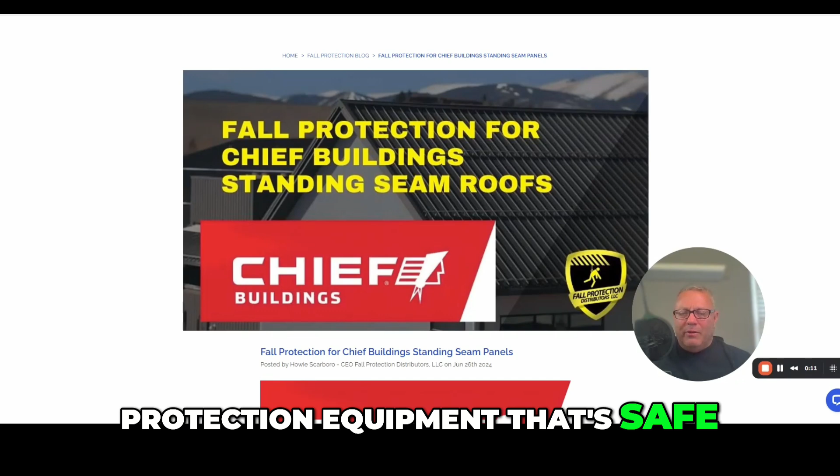I'm Howie Scarboro. I'm the CEO of Fall Protection Distributors, and we've recently released a blog about Chief Buildings standing seam profiles. And what we're talking about is compatible fall protection equipment that's safe to use on their roof systems to protect both the roof metal and the workers.

So if you'll jump into this blog, you'll see we go well into depth into the different products and the different panels. We talk about which gauges you can get them in, the shapes of the seams, and we'll make it very easy to identify which panel you have on the project that you're working on.

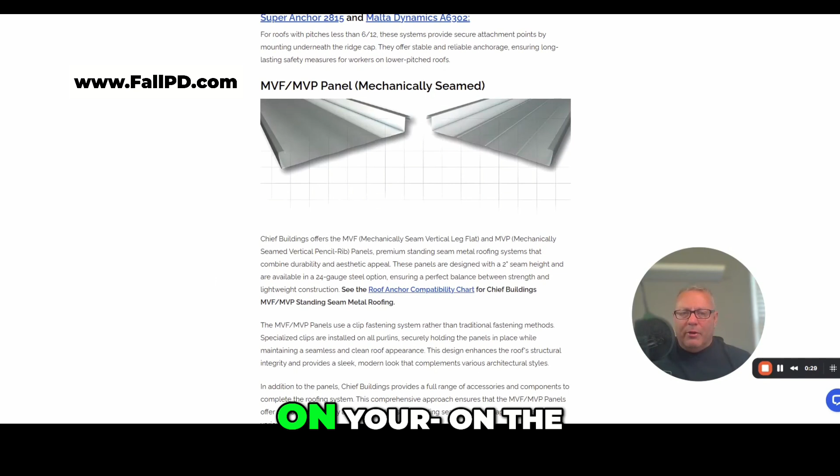So all along this article, there's several links to this roof anchor compatibility chart. That's just going to jump you down to the quick reference chart that's at the bottom of the page. So now that you know which panel you're working on, those are listed across the top. We're very compatible with their series of standing seams. So let's talk about the equipment.

So starting with the seams, the SSRA1, this is available with two different types of set screws. So the standard configuration is an all stainless steel cup tip screw. This is meant for 22 gauge steel. You're going to torque these to 90 inch-pounds. So this is going to give you a single worker tie off. And with the removable D-ring, you can add adapter plates to this. We'll get into those in a minute.

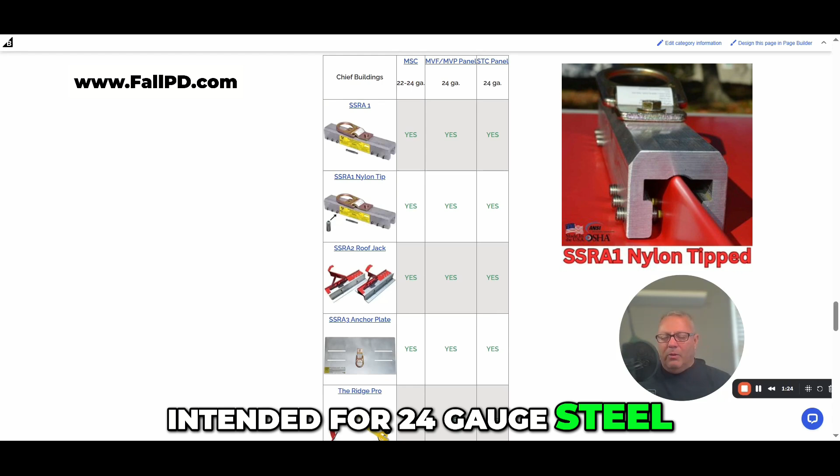The other alternative is an SSRA1 nylon tip. So the nylon tip, it's the same anchor, it's just a different screw. It has the little nylon bushing in the end. And this is intended for 24 gauge steel. So we're going to use a softer bite on the seam, but we're going to use a little more torque. On this one, we're going to go 180 to 200 inch-pounds.

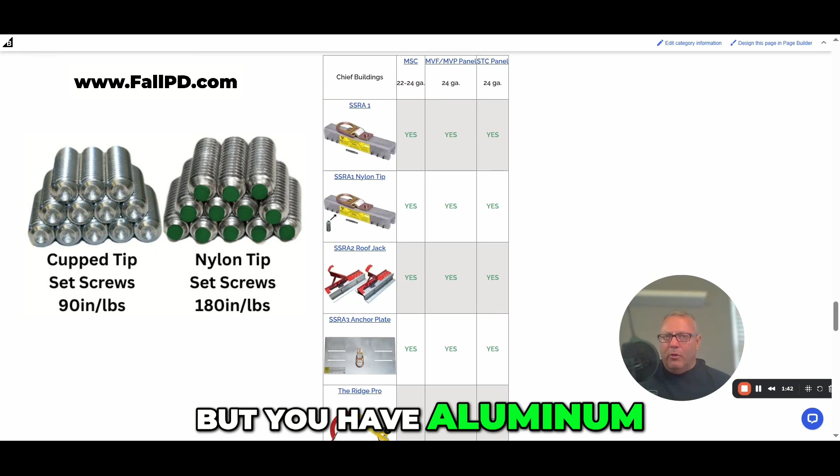So with either of these, we're talking about steel panels only and 22 or 24 gauge, and these are non-curved panels. So if you have a similar panel, but you have aluminum or zinc, 26 gauge steel, 29 gauge steel, or a curved panel, these are not compatible.

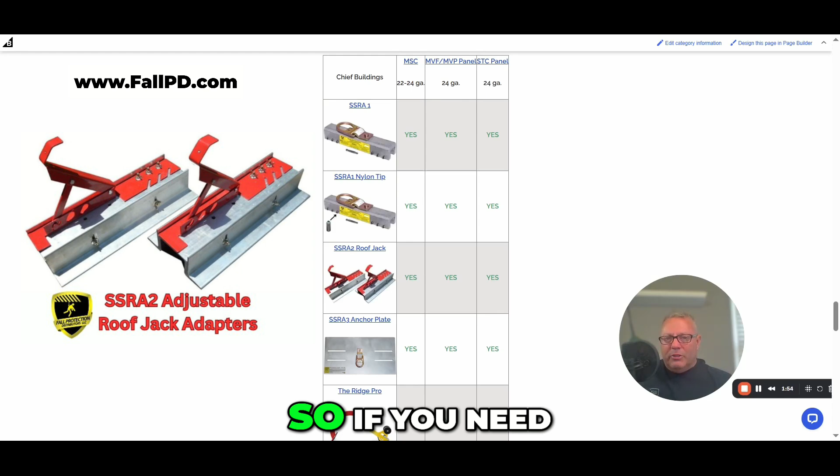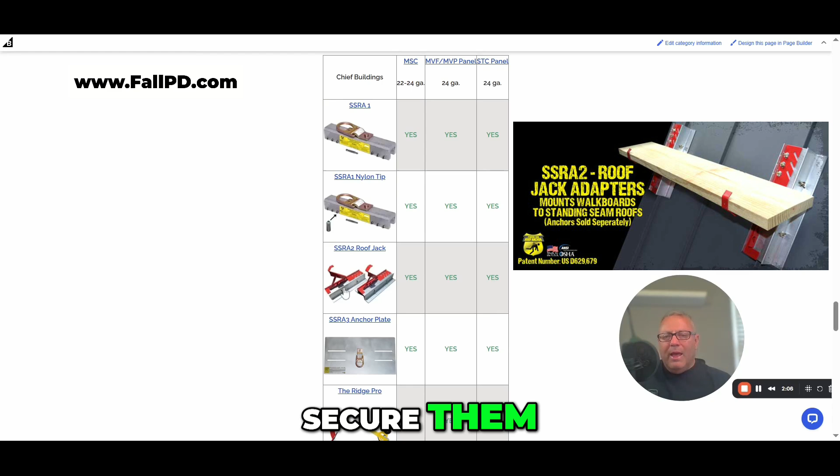So once you have your seam anchors in place, now you can add adapter plates. So if you need to add 10-foot walk boards, you would mount two SSRA1s about 8 feet apart. You would remove the D-rings off the top, and you would drop a pair of SSRA2 roof jacks on top, secure them, and these are adjustable for different height seams as well as different pitch roofs. So that's your 10-foot walk board.

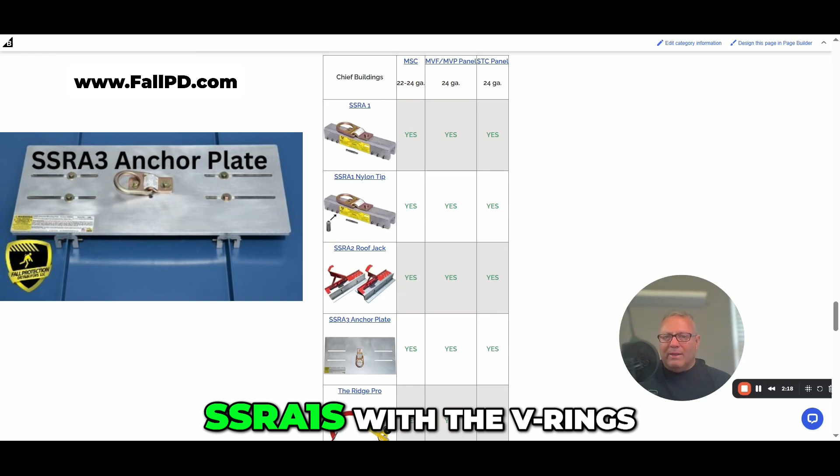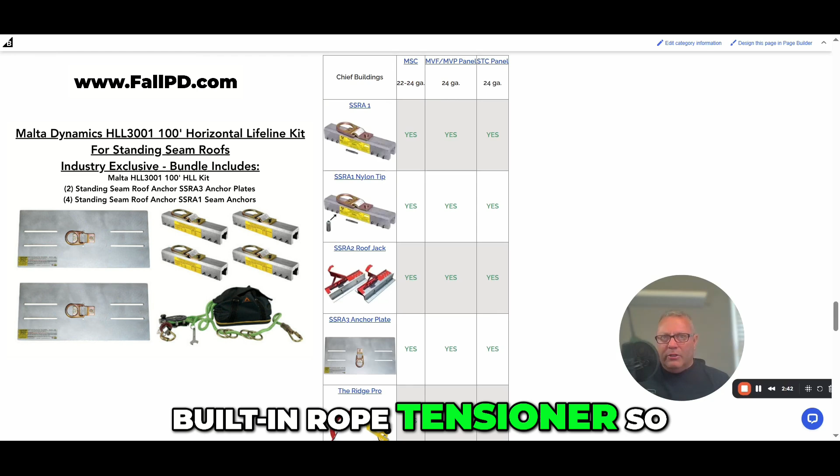If you need 100-foot temporary horizontal lifeline, you can use two SSRA1s with the D-rings removed and mount an SSRA3 anchor plate on top of those, and you would have one of those assemblies at each end of a 100-foot rope. That 100-foot rope, we do offer a kit on our website that has 4 SSRA1s, 2 SSRA3 anchor plates, and a 100-foot temporary horizontal lifeline, and that has a built-in rope tensioner, so you can shorten that rope to any length that you need to get the task done.

Now, it's going to be safe for 2 workers on that horizontal lifeline. If you have more than that on your crew, just add a couple of extra SSRA1 seam anchors. Just mount them on a seam below the rope, sort of near the work area, and once your worker gets to his work area, he can clip off the rope and into a fixed anchor point down on the seam.

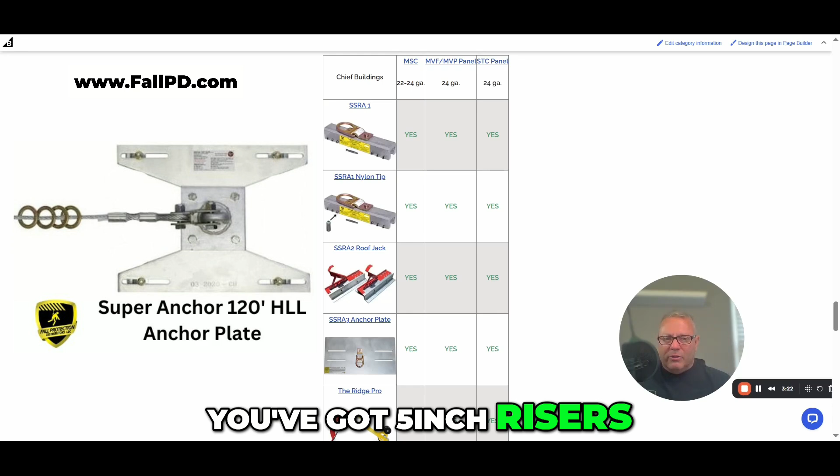So we also have an industry exclusive 120-foot permanent horizontal lifeline. That's a galvanized steel cable. You've got 5-inch risers. It's made exclusively for standing seam roofs. You got seam clamps, base plates, and 5-inch riser posts. So that's another that might work for you if you need a permanent solution with a horizontal lifeline.

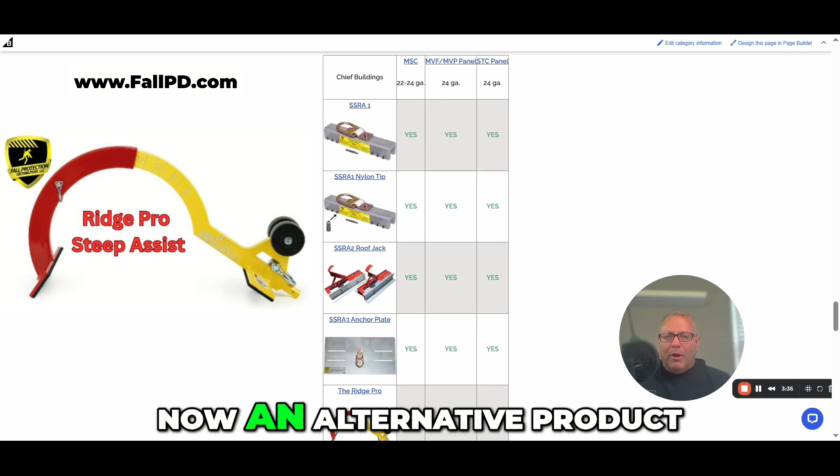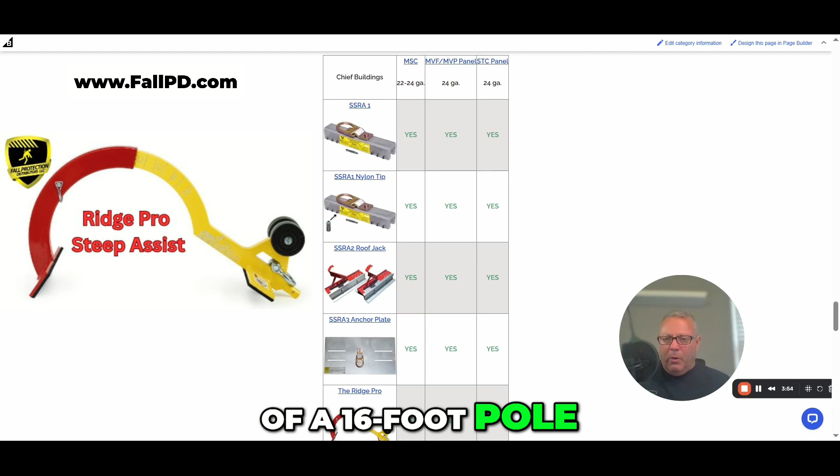Now, an alternative product is the Ridge Pro. The Ridge Pro, it's a great product. It's intended for 6/12 to 12/12 pitch roofs, but it doesn't have to be a metal roof. They're a great first man up product, but it mounts on the end of a 16-foot pole. You would climb a ladder, use the 16-foot pole to run it up the roof, flip it over the peak, and it now has secured a vertical lifeline that's attached to your harness.

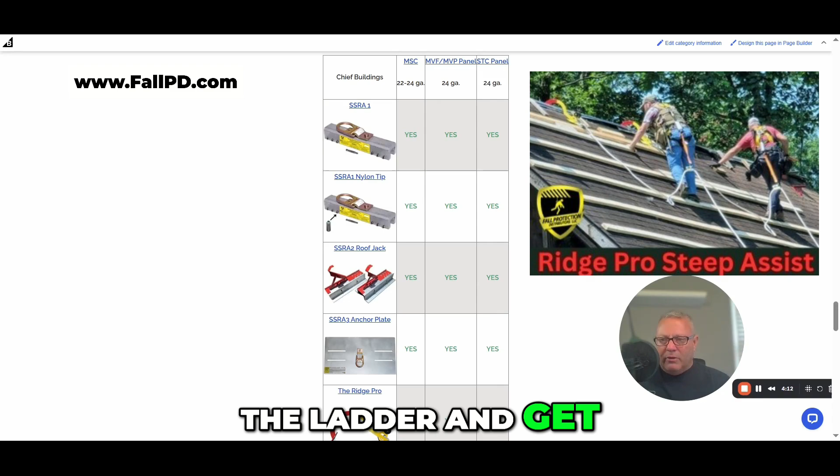So as soon as you step from the ladder to the roof, you're already tied off. You can do your inspection, do your repair, safely get back to the ladder and get to the ground, and you stay tied off the entire time. So that's the Ridge Pro.